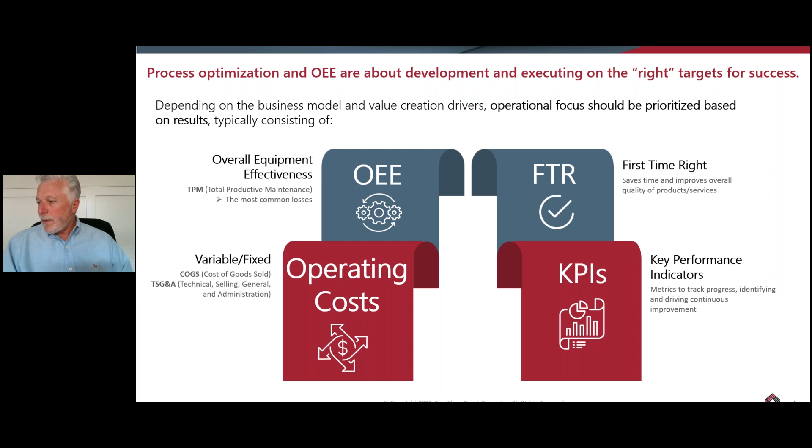So if we look at the slide, for process optimization and OEE, depending on the business model and value creation drivers, operational focus should be prioritized based on results. That to me is what should be behind why we do this. They typically consist of four different areas: OEE, or overall equipment effectiveness; first time right, FTR; operating costs, which can be variable, fixed, and sometimes accounting practices will use semi-variable or semi-fixed; and then KPIs, we'll talk about some key performance indicators. Next slide.

Overall equipment effectiveness, OEE, is a KPI that compares your operation's ideal performance to its overall real performance. OEE is a quantifiable way to measure how well your equipment, people, and processes are working by measuring availability, performance, and quality. Key to OEE success is the development of a solid baseline.

It's very difficult to jump into OEE without getting that baseline, and I would highly recommend you put much energy into that. Before spending too much time on the actual numbers, focus on continuous improvement activities established from the baseline. For you long distance runners, a little sports analogy here.

Think of the OEE as a journey like a marathon. It's a long run with many obstacles to overcome. The job of the runner is to take many small improvement steps over the course of the race to reduce the final time. That is how to improve your OEE score. Next slide.

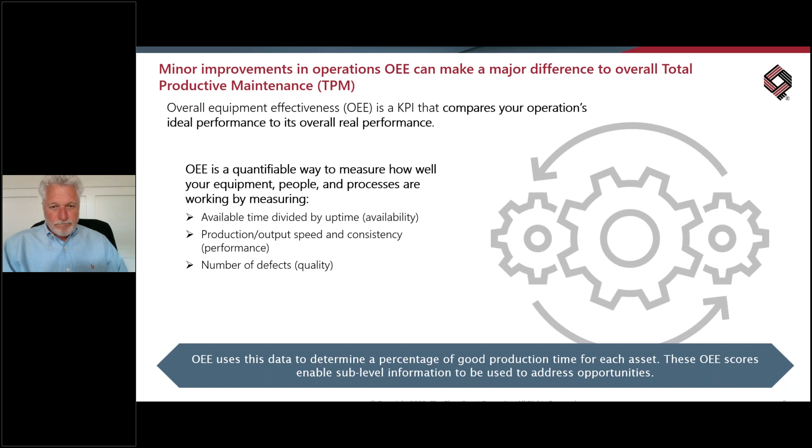So, equipment-based productivity loss in manufacturing is caused by several common factors relating to availability, performance, and quality. Using those common losses concept creates a clear path to improving your OEE score. Working to reduce availability loss from equipment failures, setups, and adjustments protects against preventable unplanned downtime while minimizing your unplanned stops.

You want to be addressing performance loss that results from idling and minor stops, as well as reductions in speed, which prevents small stops and slow cycles from accumulating. You want to be minimizing quality loss in the form of process defects and lower yield, which reduces the number of unusable products produced during steady production.

Let's break down the most common TPM losses or gaps in greater detail. Next slide. So, I'm sorry, Marcus, go back to the previous slide.

Okay, so as we said, there's many different ways that you can improve your TPM losses. Those can be in the form of equipment failure. They can be in the form of setup and adjustments. They can be unplanned stops. They can be planned stops. Go to the next slide, Marcus.

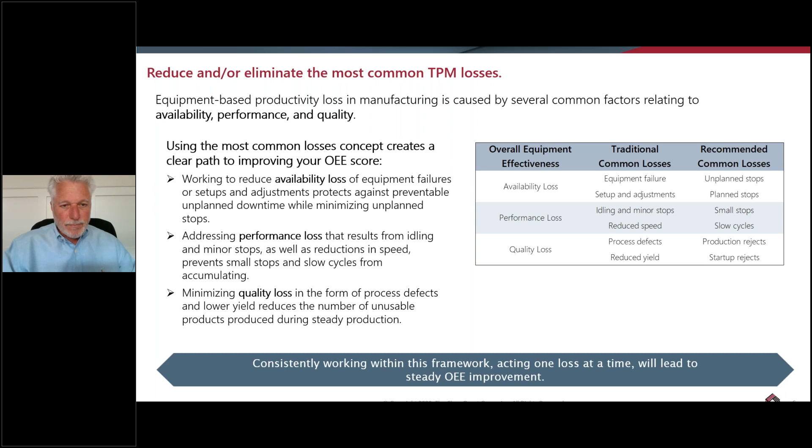The loss due to equipment failure accounts for any significant period in which equipment is scheduled for production but is not running due to failure. A simple way to relate to equipment failure is any unplanned stoppage or downtime.

The common examples of equipment failure are machine breakdowns, improper setup, unplanned maintenance, and from the broader perspective of unplanned stops, additional reasons might include the lack of operators or materials, your process is choked by upstream equipment, and your process might be blocked by downstream equipment. Next slide.

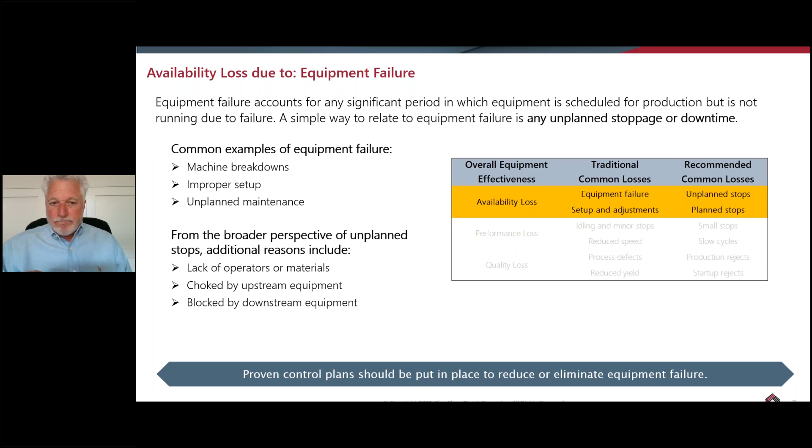Availability loss due to setup and adjustments. Setup and adjustments account for any significant period in which equipment is scheduled for production but is not running due to changeover or other adjustments to equipment. Some of the common reasons for setups and adjustments might be product to product equipment modification. It might be related to product changeovers not being optimal, or even maintenance that's unplanned.

Production schedulers should target customer satisfaction as well, meeting on time in full delivery related to production, and efficiency costs where production campaigns are maximized. I think it's important to mention that you want to reach an equilibrium if possible between the service level that you provide to the customer and the costs whenever possible. Next slide.

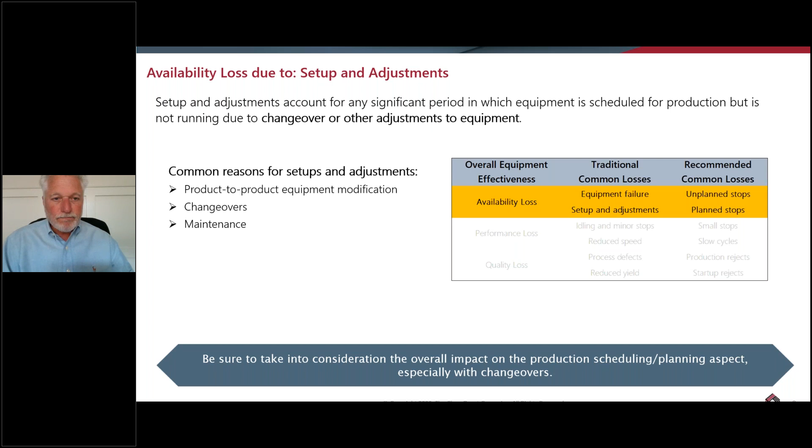Idling and minor stops account for time when the equipment stops for a short period. It can only be maybe a few minutes or less while the operator resolves an issue. A simpler way to view it is any small stop leading to performance loss.

Some examples of idling and minor stops might be raw material disruptions, plugged transfer lines, incorrect operator parameters or work instructions, improper calibrations, the need to locate ancillary equipment that might not be stored in the right place or easily accessible. And it could also be related to design issues.

While performance-related issues may appear small in magnitude, they add up when multiple occurrences happen almost simultaneously. Most companies not embedded in a robust continuous improvement culture tend to ignore the potential. For example, it might be only a few minutes. You'll hear that over and over from the shop floor. Well, it only took a few minutes.

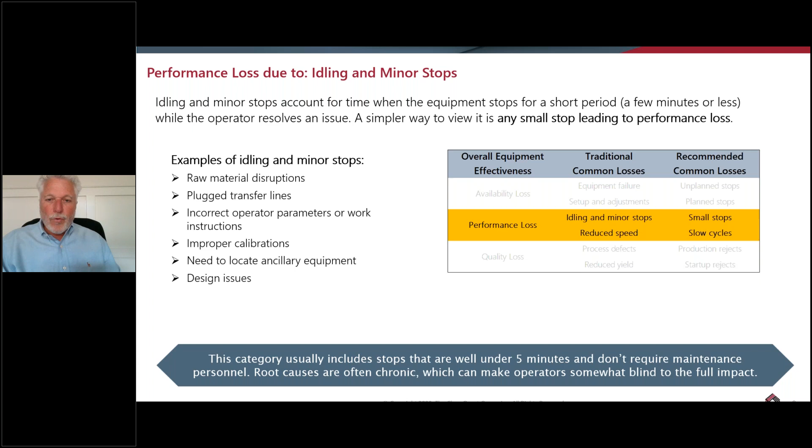Again, it's about that analogy that I gave previously on the marathon. Little things add up, and those over time with different machines can really make a difference over the course of your production cycle. Next slide.

So another factor in performance loss is reduced speed. Sometimes it's called slow cycles. This accounts for time when equipment runs slower than the ideal cycle time. So examples of reduced speed would be poor maintenance, substandard raw materials can be a cause of that, limited ancillary equipment, poor environmental conditions in the plant, and it could be related to operator inexperience or general lack of training for the operators.

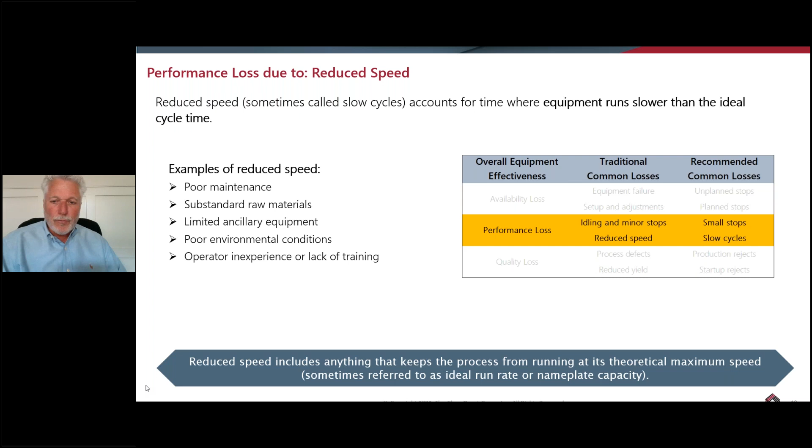Related to the operator inexperience or lack of training area, there can also be situations where operators slow down the process knowingly or even unknowingly. This can happen for various reasons. Supervisors and shop floor personnel should keep a close eye on making sure the operators are working to their full potential and doing what's within their power to stay on track when it comes to not taking unnecessary breaks or what have you. Next slide.

So we move to quality, and here process defects can account for defective material produced as off-spec batches or from startup until steady state production is reached. You get to your continuous process. Examples of some process defects that you might be aware of are lot-to-lot raw material variation, incorrect equipment settings, or operator or equipment handling errors.

In addition to process defects impacting OEE unfavorably, the increased inspection that goes as a result of poor quality results in added costs as well as potentially inferior or out-of-spec product reaching the customer. Best to eliminate the defects altogether. It's going to help both your cost situation and it's going to end up being a better product to the end customer in the end. Next slide.

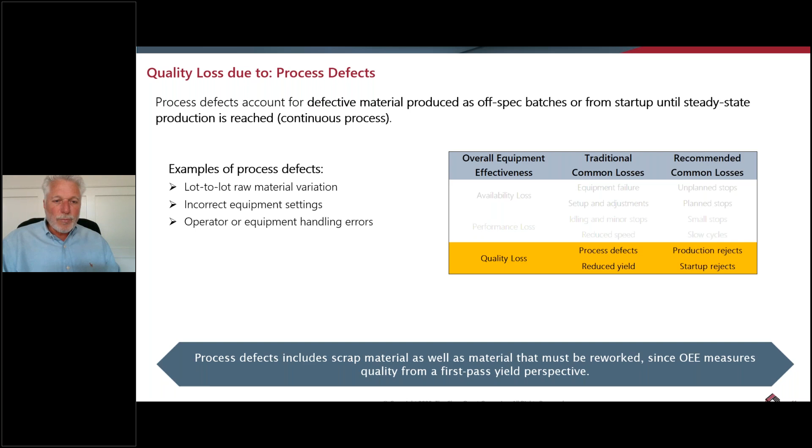So also related to quality loss is reduced yield, which accounts for material loss due to poor processing that results in suboptimal finished product output. Some examples of reduced yield are suboptimal changeovers, incorrect settings on a new product run, equipment that requires warm-up cycles, or poor operator training. Hold on one second.

In addition to being a quality loss, depending on the costs associated, yield losses can be quite significant to a company's profitability, especially when you consider today the high inflation we have experienced due to raw materials increasing over the last few years. Yield to me right now has a higher payback and a higher penalty than it did before the inflationary period hit. Many of these materials have risen in excess of 30–40%.

I think when it's applied, you can rework your material back into the process by reducing waste, using a first-time right mindset; increasing the first pass yield saves time and hence costs. Taking a best practice approach to first pass yield improvement is the way to go.

Let's say, for example, think in terms of the goal of 100%, or 1 pound or 1 unit into your process, hoping for a goal of 1 pound, 1 unit out of your process. That would be 100%, or basically no yield loss. Well, that's very unrealistic. But what you can do is determine the yield. Once you determine the yield, let's say you're at 90%, but your goal obviously would be to get to 100%.

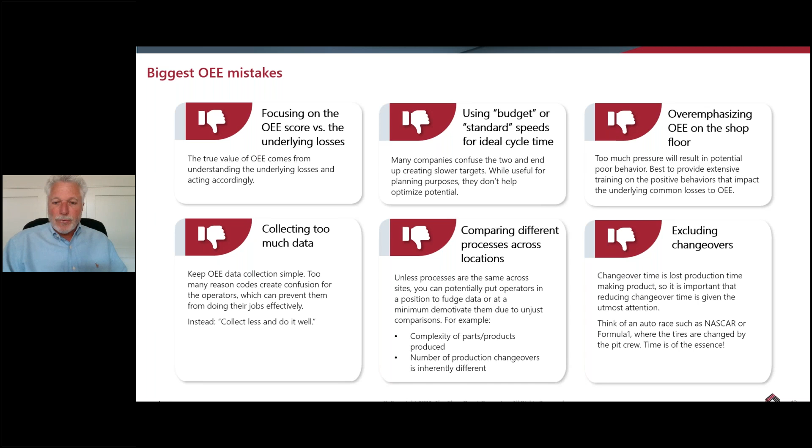Now, I'm not advocating we do things in an unsafe way by doing things quick, but you can see the magnitude of a quick changeover and what it can do on your race results. That's also your performance results in a plant by keeping your lines running and optimal. Next slide.

So I wanted to introduce a kind of a metric that's a fallout of using OEE on the shop floor. One of the visuals recommended across plant shop floors are the TAED dashboards, which is target, actual efficiency and downtime. It's important to use clear and achievable metrics for everyone to understand and be engaged in the process, real time. This visual across the plant floor helps the frontline production teams be focused on their activities in real time.

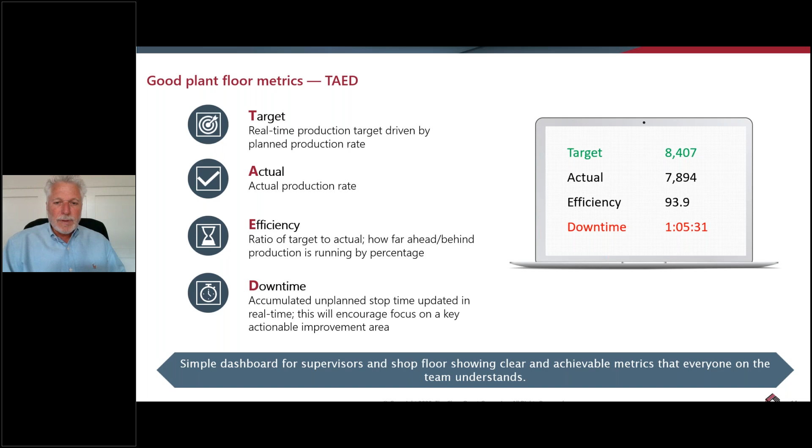Again, think it's similar to a pulse. It's also highly recommended that the metrics not be used to compare or share results by shifts or whatever. It's better to focus on the issues. What's nice about this is when you walk into that shop floor and you see this visual above a line, where your scores are kept, it gives you, again, back to the pulse analogy, where you are in the overall process. And it can give you that sense of urgency or lack thereof to what has to happen to get back on track. Next slide.

So let's shift gears a little bit and talk about costs. I just want to give you a brief education on how operational costs impact operational performance in manufacturing. So operational costs are an ongoing expense incurred from the normal day-to-day running of a business. They can be categorized as fixed, variable, or semi-variable. Some accounting policies will refer to them as direct and indirect.

I'm not here to give an accounting lesson. We'll let the accountants sort that out. But I think what's important for our discussion today is the key ones. And cost of goods sold is probably the biggest one on the shop floor, where we take in your direct materials, energy, and direct labor. Then you get into more of the overhead categories, being technical, selling, general, administrative, sometimes referred to as TSG&A. Some of them might include rent, equipment, inventory, marketing costs, payroll costs, insurance, R&D. Anything that's considered in that administrative or overhead category typically falls into that.

I would just say that typically the companies with a high proportion of variable costs have a much better chance of controlling their costs in relationship to sales. It's much easier, why it's called variable, to shift your focus on variable costs and take them out quickly and in direct proportion to sales than it is fixed. Fixed sometimes is a longer term approach and it may take some sacrifice. The key is never get to a point where you build them up so high in the first place. So those are really the basis of the takeaways for the background for operational costs. Next slide, Chris.

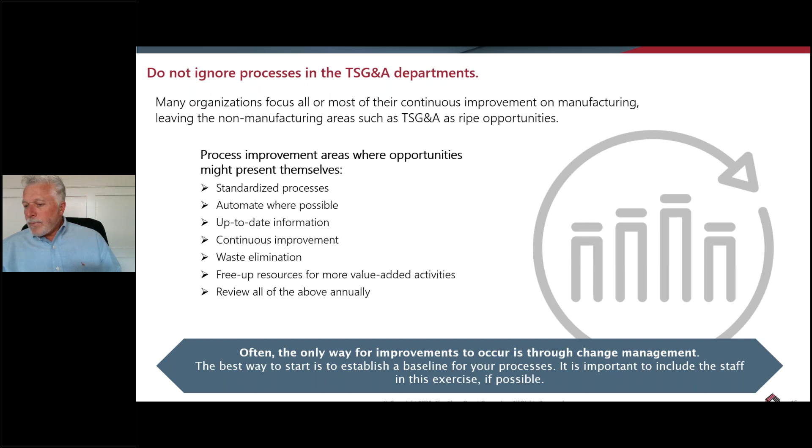So what are the best tools to best manage your TSG&A costs? A lot of companies will use a process called process mapping, where you'll go through from A to Z all the tasks that are being performed within a given area or function. And you're looking for waste, you're looking for redundancies, you're looking for unnecessary steps, and you approach it in trying to take some of that out. Again, reducing hours that can be spent on more, let's say, value-added approaches.

Delegation. I mean, that goes without saying. It's important to delegate, have the right people performing the right tasks. You don't want your senior people performing what I'll call more mundane or more clerical tasks in an organization. Make sure you're right sizing your organization to the tasks that are being fulfilled. New technology is another example. Software to make your job much easier. There might be some software tools out there that get rid of some of the what I'll call more redundant or lower end work. There's always ways to look at it through that way.

And then outsourcing tasks. I think sometimes companies are hesitant to outsource tasks. Be it they look at it as an expense, but there may be some things that are actually more cost effective being done by an outside group where the expertise is there than you trying to reinvent the wheel and do it yourself. I'd say in my experience working with companies and organizations, the TSG&A areas are often neglected or sometimes even ignored. It's important when committing to continuous improvement that it is done consistently across the entire enterprise.

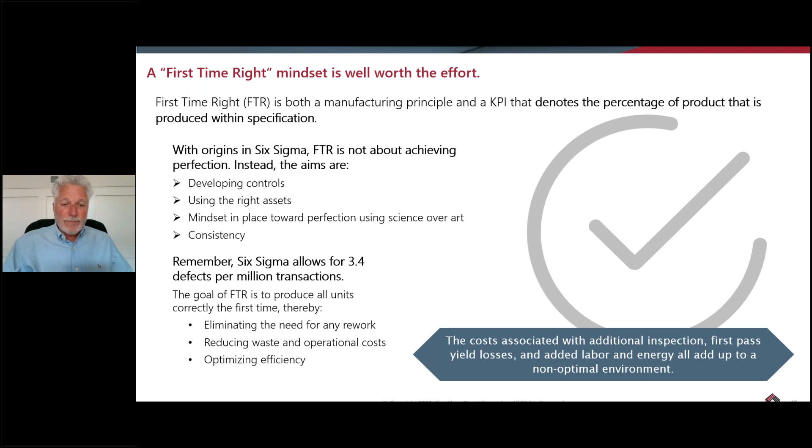And just a point, remember, Six Sigma allows for 3.4 defects per million transactions. The goal of first time right is to produce all units correctly the first time. That is the goal. How do you do it? You do it by eliminating the need for any rework, reducing waste and operational costs, and optimizing efficiency. Next slide.

So how do you calculate an FTR score? Depending on the operational complexity, a total FTR score in the high 90s% would be viewed, on a large sample basis, as excellent, while a score in the high 80s% shows significant room for improvement. The calculation is pretty simple. First time right equals number of units in specification divided by total units produced, times 100. That's how you come up with the calculation.

So what are some of the FTR manufacturing areas that can be improved upon to get that higher score? One is standardized operating procedures, more monitoring of your processes. You want to have consistent materials, quality of materials coming in, maintenance, as well as operator training to include feedback.

My experience with coming into an organization and observing some of the following behavior: if you're hearing things when you come into an organization such as, we simply rework the waste back into the product. Why rework in the first place would be my question. Tasks done over and over again, where steps can be eliminated. Close enough, or you hear, it's close enough, or we're in the ballpark. That will do, et cetera, et cetera.

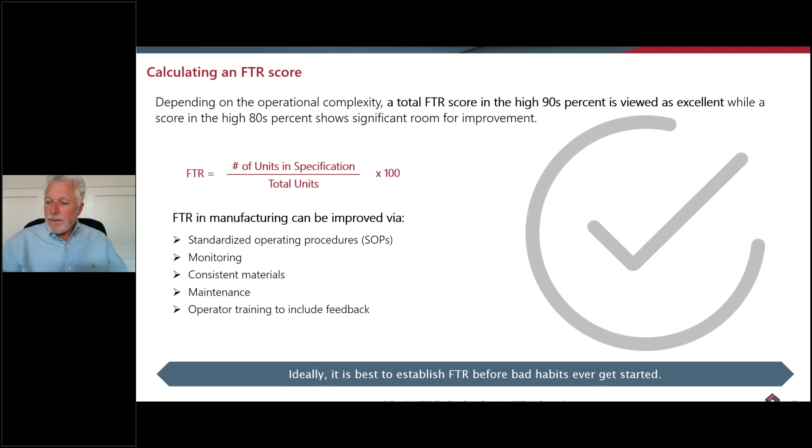You know, cultures get complacent, and at times they're happy to just take the way it's always been, or they don't have an understanding of what those first time right gains can accomplish to their bottom line. Education's key for management and peers to let people know that those little things add up. Next slide.

So let's move to KPIs. A lot of what we're talking about are already KPIs, but I want to focus a little more on how you measure and the tactics used to get visibility.

While it's common for companies to develop KPIs, success is not guaranteed. I've seen many organizations have KPIs and they're just not using them in the most beneficial way, or they don't have the right ones. The problems arise when they're trying to establish too many KPIs. They might not be establishing the best or the most productive KPIs. They're not prioritizing KPIs effectively. They treat them all the same.

Using ineffective or even inaccurate dashboards leads to lower productivity. You've got to make sure your dashboards with the KPIs and the metrics are leading to higher productivity. And to do that, you've got to put the work up front to make sure that those are the right ones.

So on the right side, there are just 5 of what I would consider fairly typical standard KPIs that many companies use as their base KPIs. Obviously, there are many others that can be used as well, depending on their impact on the performance. But those 5 in the manufacturing world, I would probably say, are right up there in the top 5 out of 6, 7, 8. Typically in a KPI tracking environment, those 5 at a minimum would be used in a manufacturing environment. Next slide.

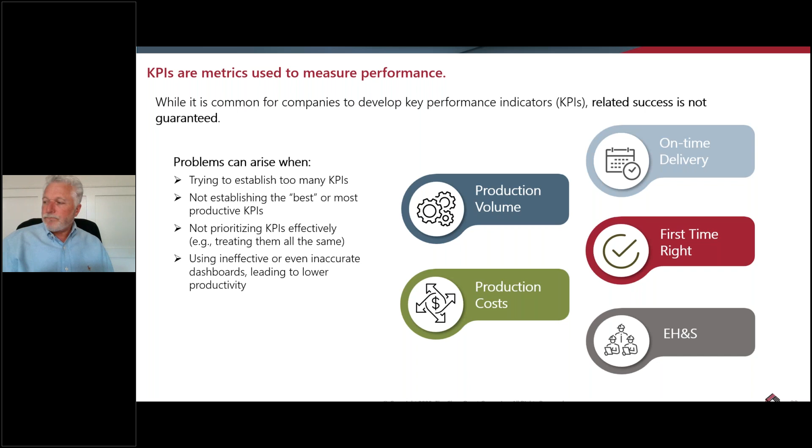So it's imperative that you create and maintain KPIs that are relative to your business. This is something that I think ChemQuest has a good feel for and can help in this respect. You don't want to just put together KPIs based on pulling them off the internet or copying and pasting what you've seen as the right KPIs. It's highly recommended keeping your scorecard as simple as possible.

Example, one of my previous assignments when I came in, the company was tracking, just in manufacturing, over 80 KPIs. When I asked the question, wow, that's a lot of KPIs, how are you doing against them? There was actually no real good answer. It was basically, we have all of them, we can give you answers on what the data says, but they really couldn't tell you whether it was improving or not. That's a sure sign that there's a lack of focus, and with too many KPIs, you really want to narrow that down.

While tracking them might be a good reason, you've got to start there. Little focus on the right KPIs will lead to poor results. The team needs to be driven by tracking performance and addressing the problems rather than tracking the issues. We recognized that we needed a complete overhaul in this organization. So we did a forced ranking of all the KPIs and shrunk it down to about 8 in total. We put focus and resources where there was the most payback. We did a Pareto based on return and really started shifting the culture away from tracking and analyzing to doing. There wasn't that accountability there for results, and we had to change that.